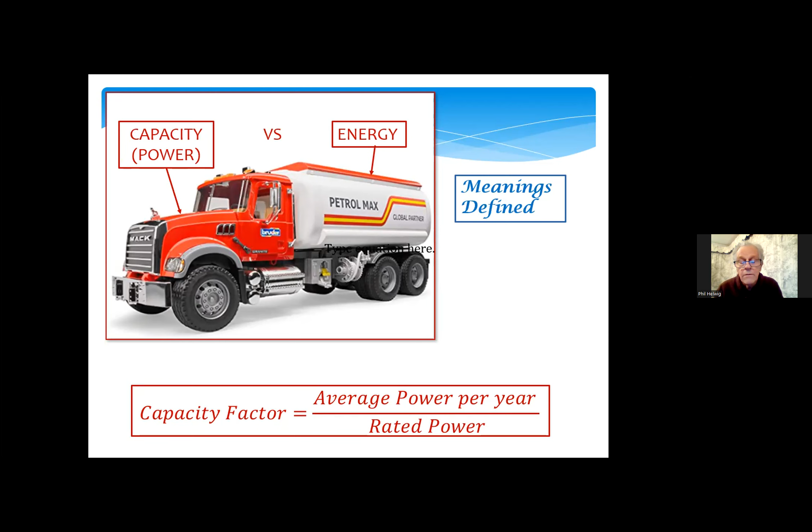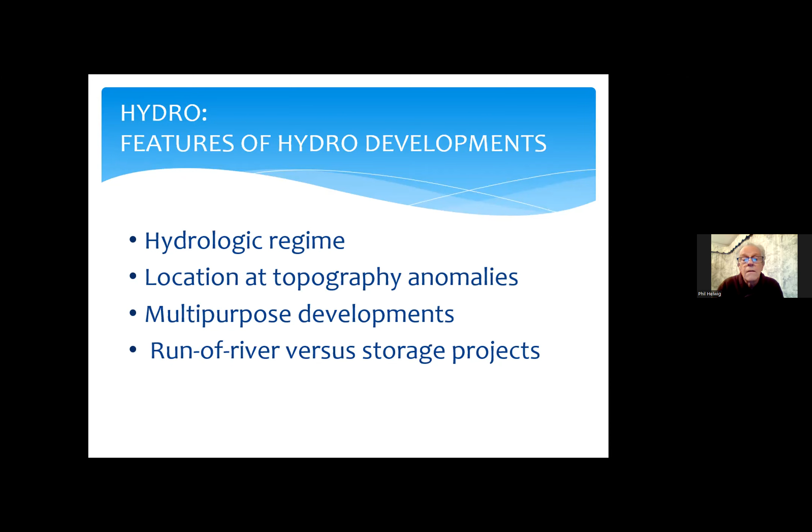We'll start by looking at the features of hydropower developments. They depend very much on the hydrologic regime, sited often at topographical anomalies. They may involve multi-purpose developments and run-of-river or large-scale storage developments. So we'll take a picturesque tour of some of these ideas. But first, we have a look at the power equation. An approximation that you might like to remember is that power from a hydro site can be estimated approximately by 8.4 times the head in meters times the flow in cubic meters per second. It's proportional to the product HQ.

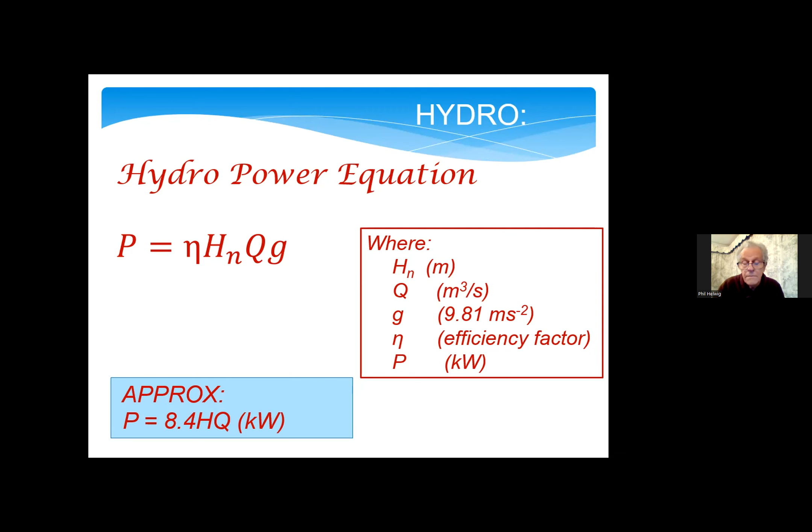Taking a leap to another area famous for hydro developments, the country of Nepal. This development, the Kala Gandaki, benefits from a short circuit around a long bend in the river. This power plant exploits the difference in head between the intake and about 60 kilometers of drop along the river to be a couple hundred meters. And it's the largest power plant in Nepal at this time, as far as I know.

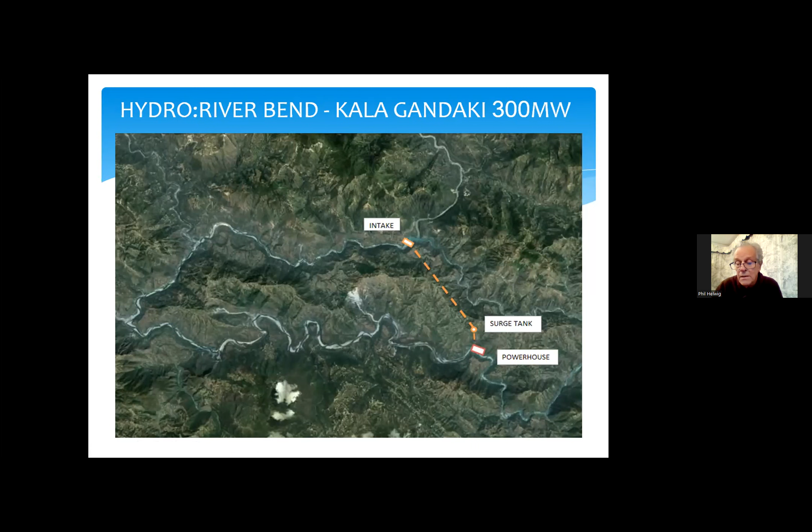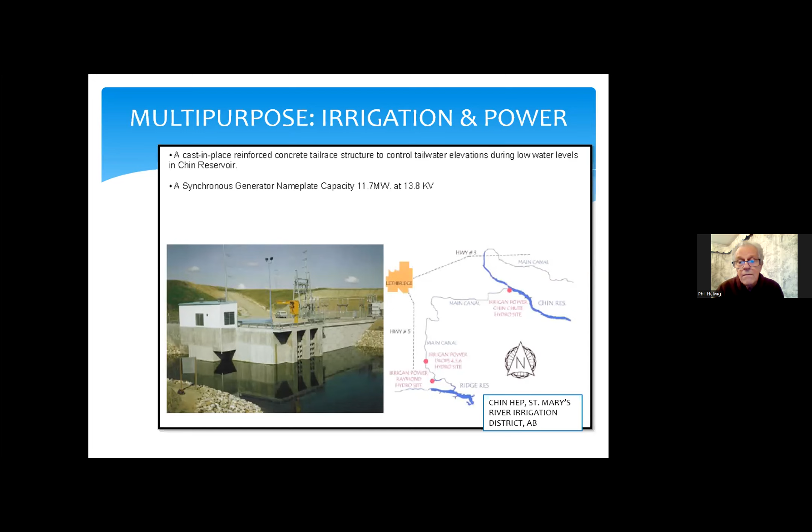Now to Alberta, the St. Mary's River Irrigation District, where my son works, an example of a multi-purpose scheme. This plant utilizes a drop in the canal where I think 100 feet, somewhere in the order of 30 meters of head is available. It's sufficient to generate almost 12 megawatts. It operates using the water flow provided to farmers. Therefore, it only functions during the period of year when water is required for agriculture. It's shut down most of the winter and spring, allowing some storage to build up in the reservoirs upstream.

This is a project in Malaysia. It's a fairly big project on the upper reaches of the Perak River, not all that far from Thailand, for those who are familiar with the geography of that area. The spillway is designed in such a manner as to route flood peaks through the system and reduce the peak flow thereby. This will be beneficial to communities downstream and for the design of 2 other hydro plants on the lower reaches of the river.

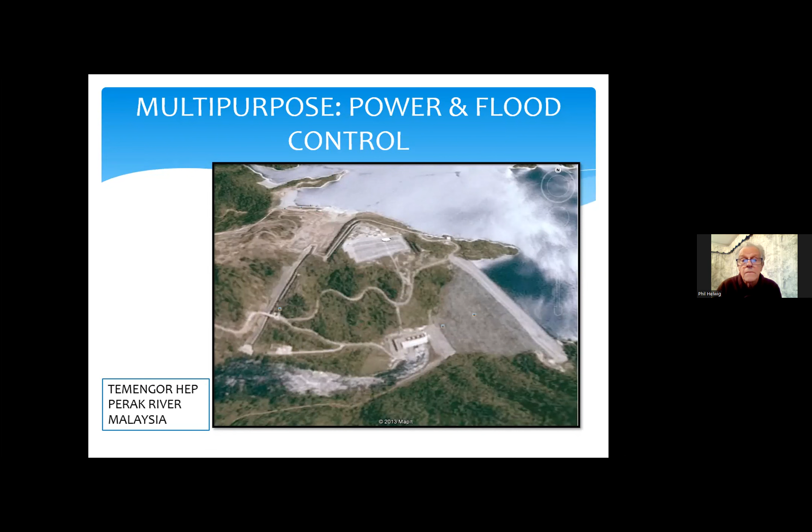It's interesting to see the importance of storage in hydro developments. So I've made this classification based on the storage ratio. It's the live storage volume in the reservoir of these different plants over the mean annual flow volume. So it's a volumetric ratio.

production for 20 hours. A small reservoir in the classification between 5 to 20% was proposed for the Portland Creek project that's taken through to a final feasibility study in Newfoundland, but never built. This reservoir is operated to maximize energy output and operates on the principle that when you have a storm, you fill up the reservoir. When the storm's over, you utilize the water as fast as you can. So the next storm, you have a capacity to capture the flow from the next storm. This project utilizes a very high % of flow, or would have if it had been built.

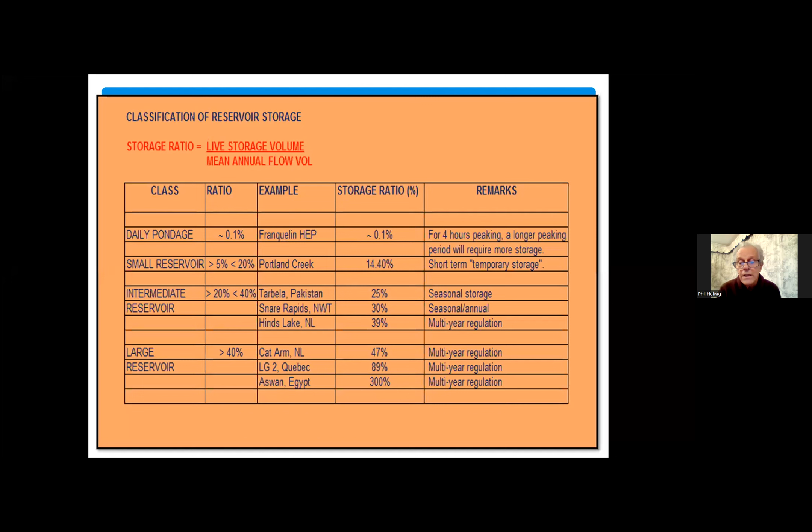I'd like to just list some of the benefits that hydro can supply. It provides complementary storage to firm up renewables such as wind and solar production, and we discuss a bit of that later. The units can be very quickly put into service in a matter of seconds, rarely more than a minute. You can put a hydro unit online, and this facilitates following peak load variations in the system. Hydro units tend to bring a lot of momentum, which aids in frequency stabilization so that your frequency doesn't stray very much from 60 cycles.

I've noted the benefits of dispersed generation sources. This applies to all of the renewables we'll be discussing. This benefits from the fact that the weather and climate doesn't exactly conform from one part of a province to another. It may be a dry year in St. John's, but quite wet up in St. Anthony's.

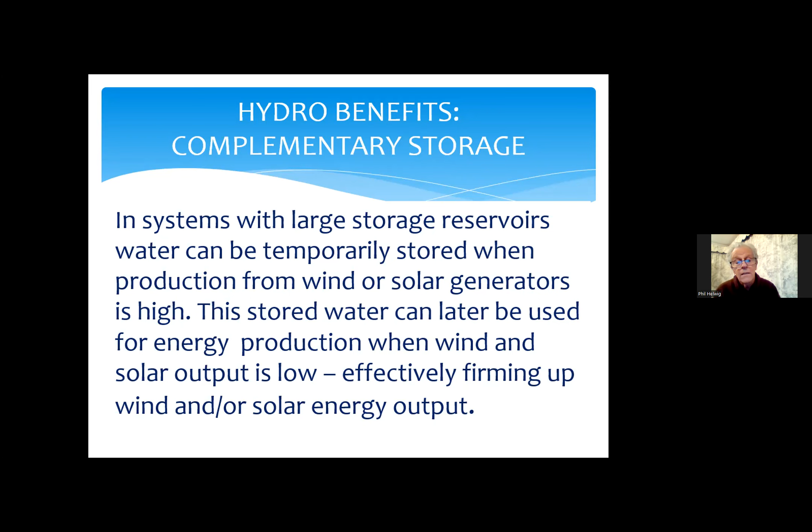It is the modus operandi which is used in Quebec to encourage wind generation in Gaspé and some of the outlying areas of the province where the economic situations are not really that good.

The challenges to hydro. Good sites are often at remote locations. That involves a lot of additional expense. Project footprints tend to be quite large. The dams, reservoirs, access roads, power corridors, etc., can be very substantial, especially for large projects. Environmental effects are both positive and negative, and the notion that all environmental effects are going to be negative is something that I think needs to be challenged. Likewise, social and economic effects may be both positive and negative. These issues very much depend on site factors.

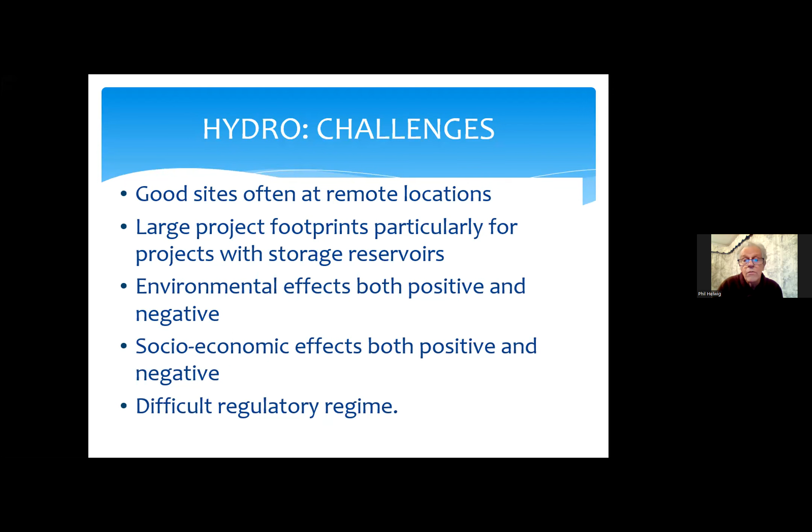Finally, the regime under which hydro plants are built and operated is very complex and expensive, less so for other renewables. Let's have a look at wind.

Let's start with aspects of this that I recall from growing up in Jamaica. We have quite a few remnants of old sugar grinding mills. The masonry is still in place, but the machinery is all gone. We used to have such a mill at my uncle's place, and it had been taken over by an owl and his and her family, and you could see the skeletons of rats and mice which littered the floor, indicating the diet these critters thrived on.

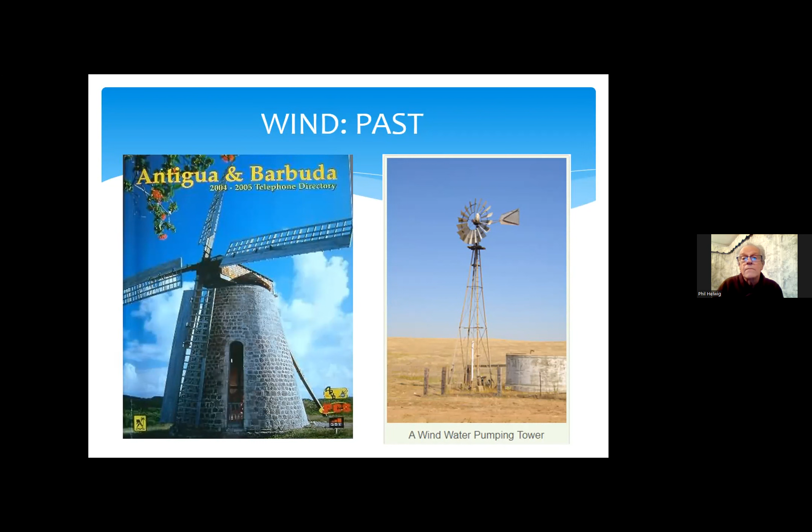In the southern part of Jamaica, on the leeward side, which is dry with savanna-like conditions, you would see wind-driven pumping systems for cattle watering. So wind has a long history. The present technologies have evolved and involve two types of approaches.

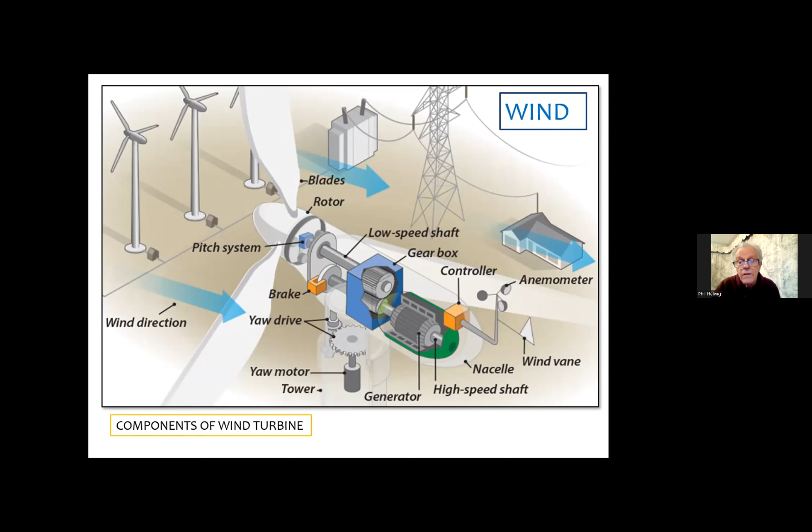The wind challenges: well, the intermittent availability of wind is an issue. The range of wind speeds constrains the spectrum of operation. Below 4 meters a second wind speed, the friction in the system exceeds the energy imparted from the wind. The cutout speed is normally around 25 meters per second. Beyond that, you risk damaging the equipment. So at that point the blades are feathered, and the machine is shut down.

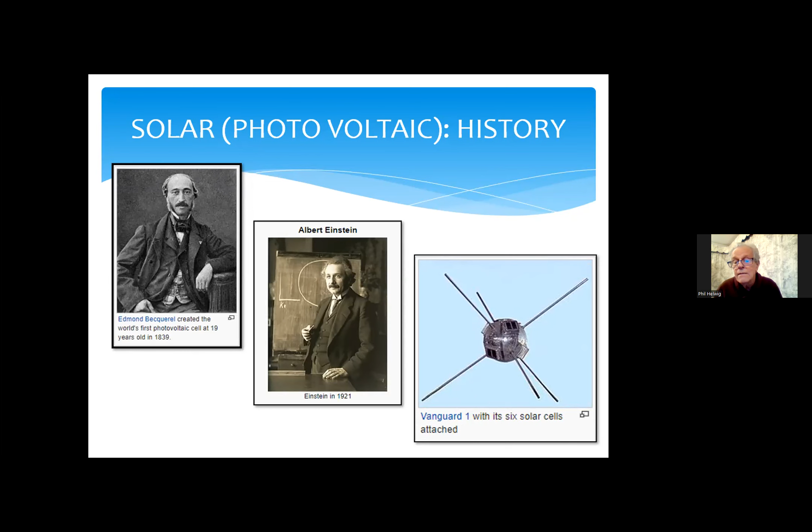The solar array is generally directed to face due south wherever possible, or as close as that. And the elevation should be, depending on who you talk to, somewhere around the latitude of the site minus about 15 degrees. Some sources say that it should be tipped up at the latitude of the place, but it's not quite true.

I saw this from the train in England. I looked out the windows at a solar farm, and according to Wikipedia, they should have been perched up at 52 degrees. They certainly weren't. They were around 30 something.

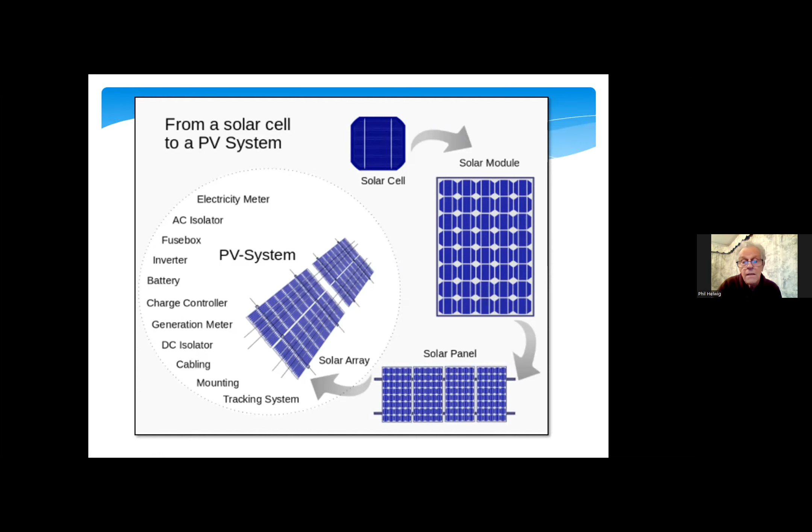On this side here, I bring your attention to basically two elements that are critical to the operation of the system: an inverter, which converts the direct current produced by the solar panels into alternating current for integration into the system, and batteries, which are employed to back up and firm up energy in some installations. The other peripherals are needed for management, but are fairly small and don't have much of a cost impact in the design of the system.

The solar power equation can be reduced into something in the order of 160 times the area, watts per meter squared. It's interesting to note that the solar energy intensity on a meter squared panel, if you wish, pointing perpendicular toward the sun, is about 1,000 watts per meter squared. And it is essentially constant regardless of the latitude of the site. So you get that amount of energy whether you're in Yellowknife or in Kinshasa.

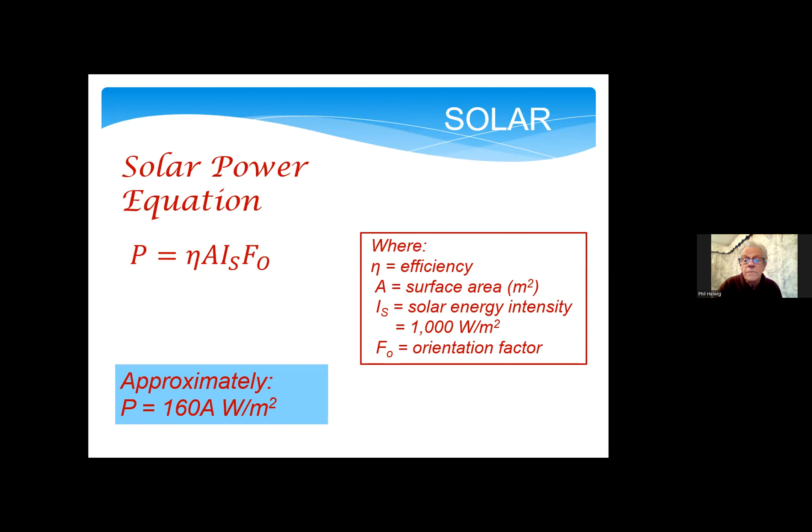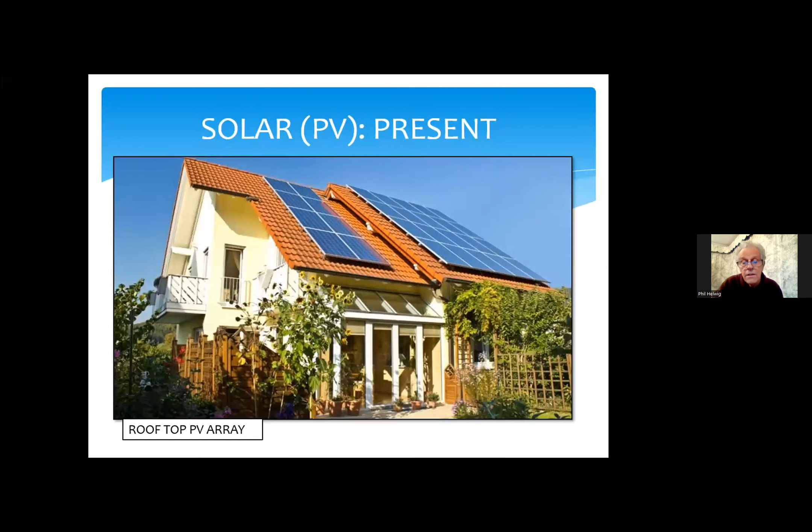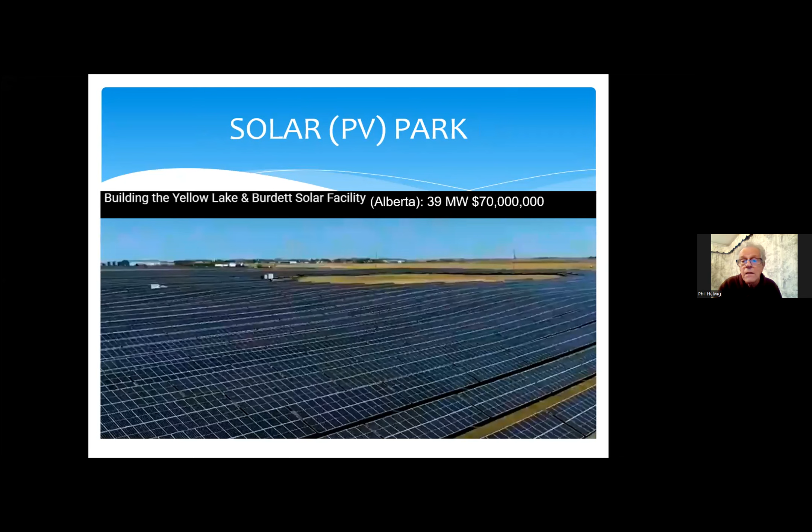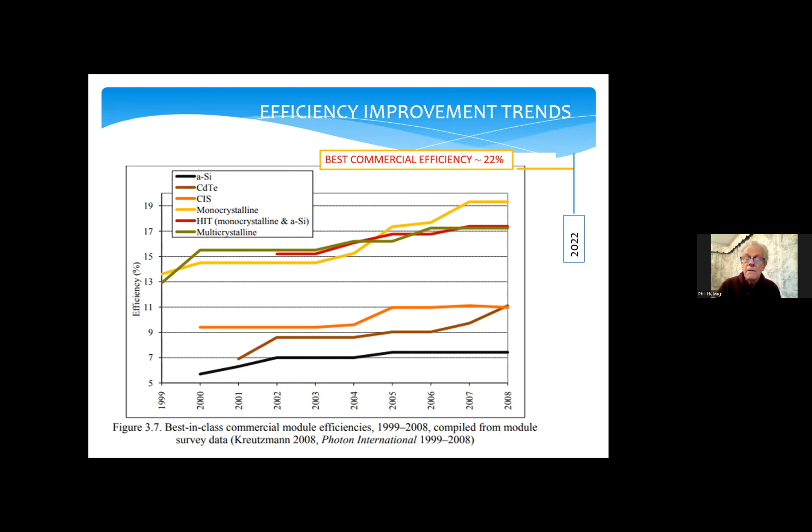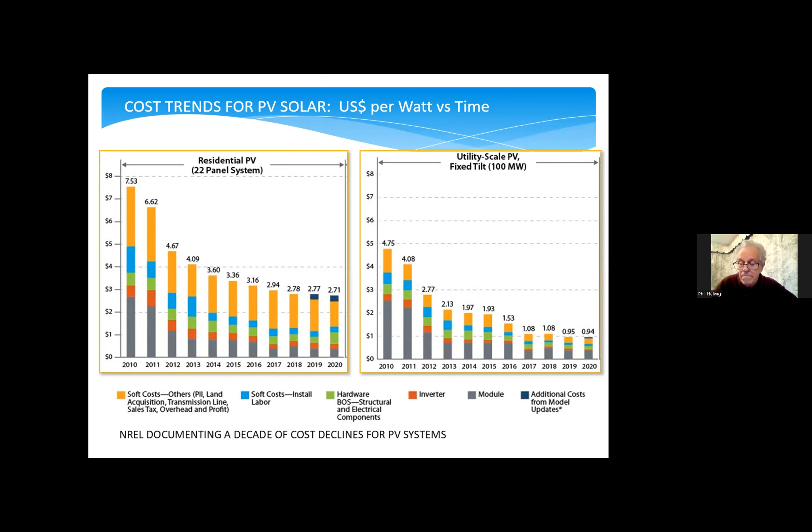Let's look at the challenges that apply to solar developments. The angle of the sun, daylight hours, shadows, clouds, air temperature to some extent, dust and snow all impair the production. The conversion efficiency is quite low, typically around 19, but working its way up; I should probably say 19 to 22.

Some projects have a very big footprint, the picture I gave you. And I think very much that a more environmentally acceptable approach would be to site solar projects on top of large buildings. I'm thinking of box stores, Canadian Tire, and big buildings with flat roofs. This way, they don't occupy valuable agricultural land.

They have the same power quality issues as wind. And I just noted they should be able to resist wind and hail, and I do believe they've been built with those challenges in mind.

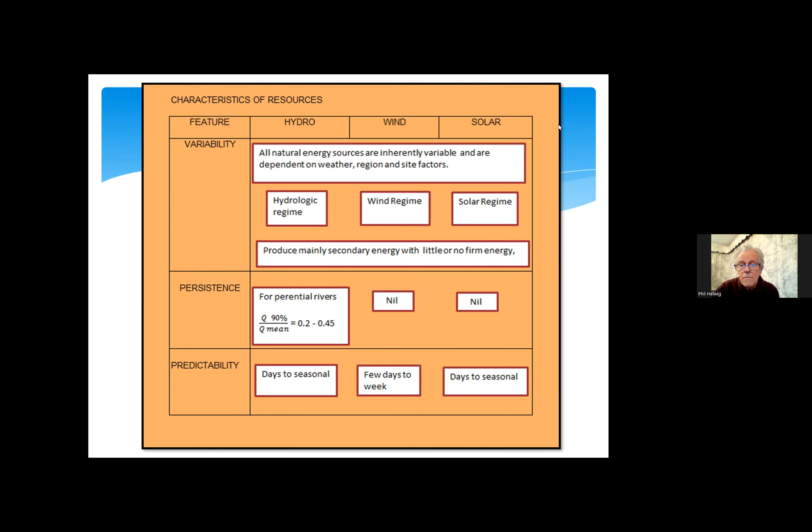Oh, now what am I going to do? Let's see. Okay.

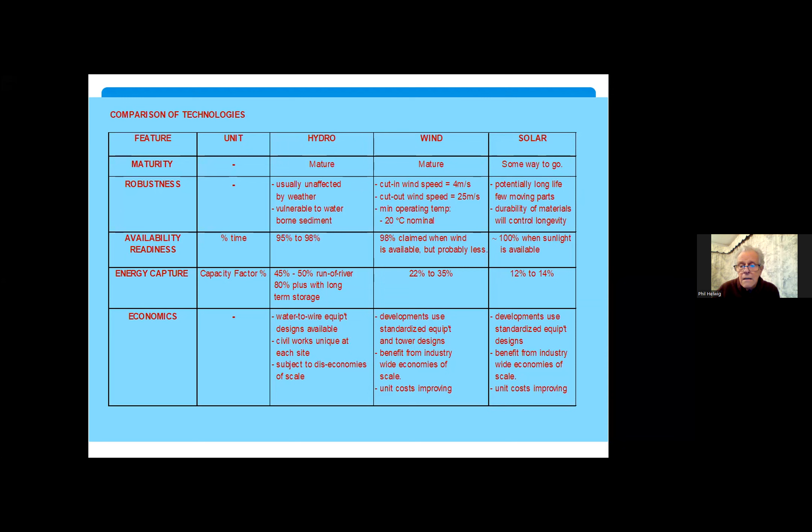Oops. So, okay, here we go.

Offshore wind, I think, is not something I see in Newfoundland's future, because we have plenty of good sites on land. And why go into the ocean and spend a lot of money on developing footings for wind towers?

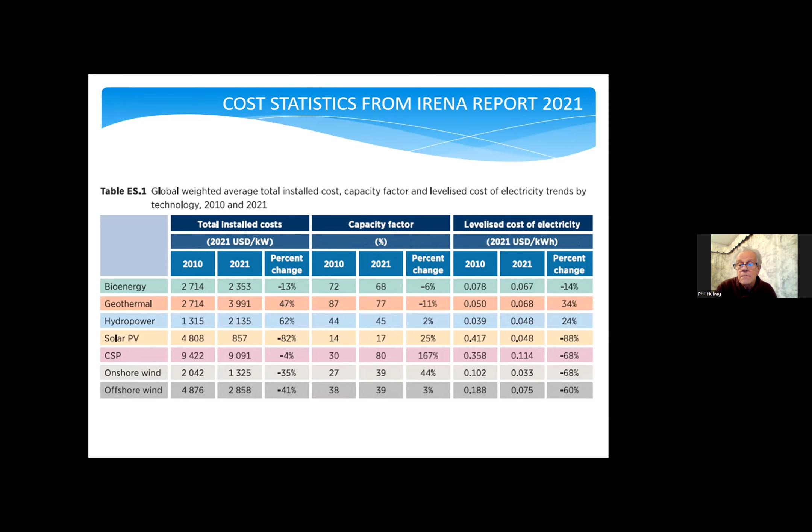Oops. Yeah. Okay, here we go.

I want to talk a little about storage, because the optimal use of renewables almost invariably involves some consideration of storage. Not shown there, I should mention that the small hydro projects of the type that have been contemplated in Newfoundland and executed quite widely in British Columbia often can benefit from low-cost storage development from numerous lakes in the country, where raising the water level by maybe a meter or two provides significant improvements on water use.

The complementary storage, I've already gone through that. It applies for coupling systems with large reservoirs, and large in a relative sense. And the examples that I know best are Hydro-Quebec and Newfoundland Hydro and Newfoundland Power. We have two power companies.

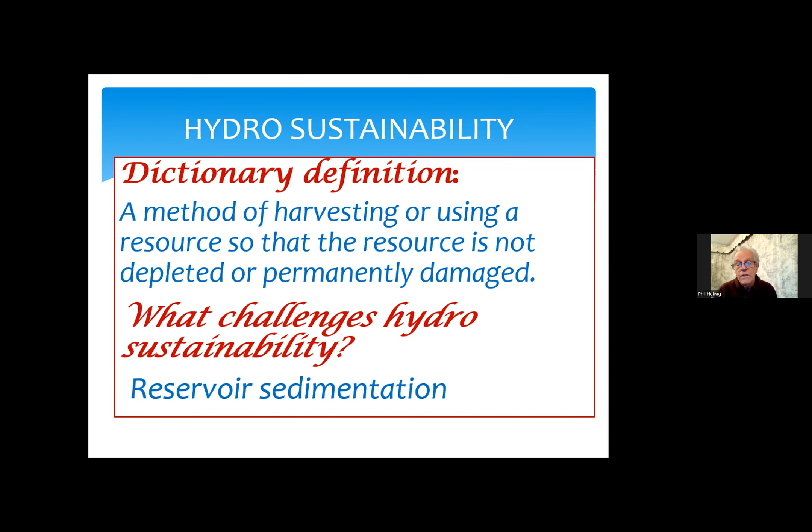So I wanted to talk about hydro sustainability, mainly because a lot of the dialogue and discussion about renewable energies has discounted hydro. And part of this is arguing that hydro isn't sustainable. Well, I claim that the main challenge to sustainability for hydro is the question of reservoir sedimentation. Now, imagine run-of-river projects with low dams and gates to flush sediment downstream. This type of design preserves reservoir capacity. Sedimentation isn't an issue.

For projects located in areas with little soil cover, and features such as marshes, ponds, lakes, typical of the Canadian Shield, these features pretty well ensure that no sediment reaches the reservoirs. I would argue, therefore, that the assumption that all hydro projects are unsustainable is wrong.

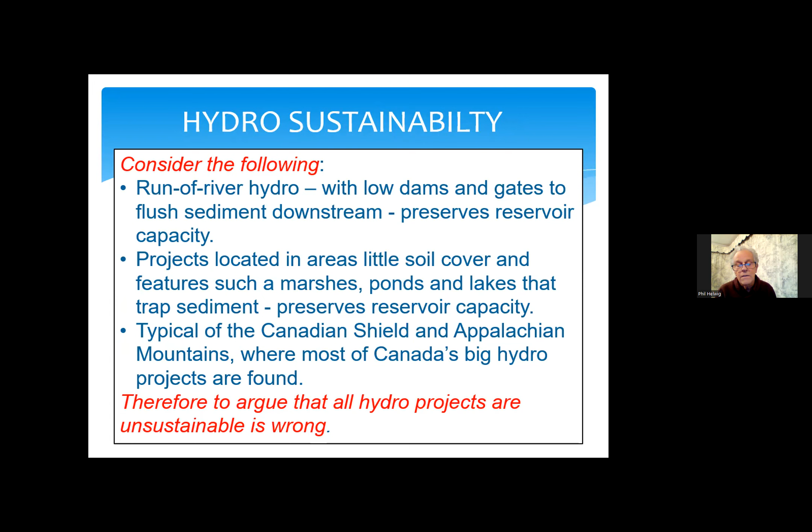I leave the wrap-up issues as points for discussion that people may wish to pursue. And my presentation also lists a short list of major references that people might pursue.